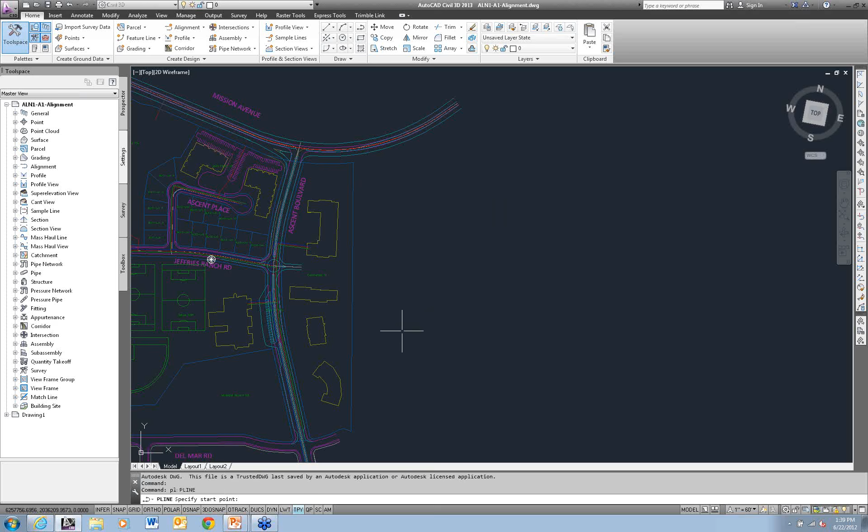So I'm going to come over here and I'm just going to play around a little bit. I am going to create an alignment. But first of all, I want to draw my geometry. So I'm simply going to draw a polyline. Start the polyline command, pick my first point, pick my second point. I'm going to throw an arc in here, so I do A for arc. And let's see, I want my arc to end about there. I'm going to go back to drawing a line, and I want this to be tangent, so I'm going to play the part of the planner, and I'm going to say, that looks tangent.

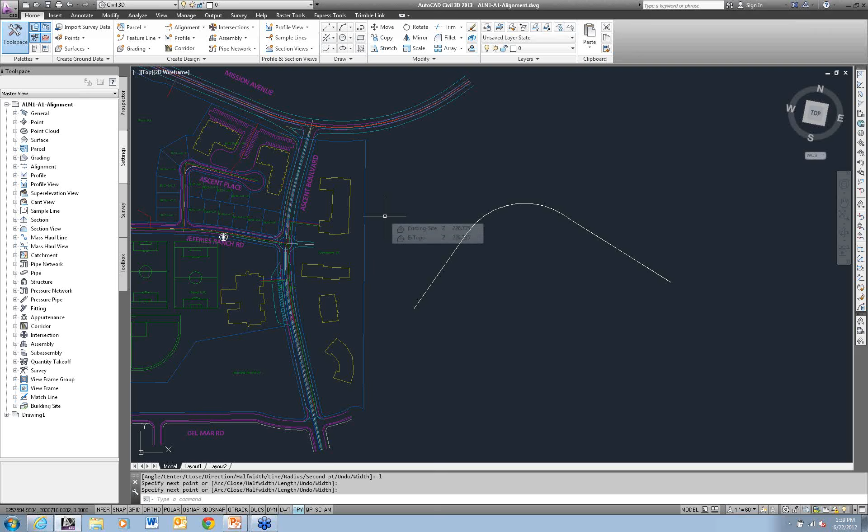I'm sure nobody has ever seen that before, right? Yes, I do know how to draw a tangent line off a curve. Don't worry about that. But you get this sort of thing all the time. Right? Somebody just doesn't want to take the time to make sure it's tangent, and you get those things like that. So I'm going to create an alignment from this. So I create an alignment from objects.

Select the polyline. I want the stationing to start at the left, so I pick near the left-hand side. It's going to ask me for the direction. That works. And then it's going to ask me for information. So I'm going to give this a name. So this is going to be Becky's Way.

My wife's name is Becky, and it's always her way. I've been married 13 years. I have learned that.

Stationing. I want to start at station, say 1+00, so 100. Assign a site, a style, labels. If you want to, you could have it automatically add curves between any angle points in your alignment. We also have something known as design criteria. So the design criteria is used for roadway design, specifically roadway design.

So I can assign a design speed, and based off of that design speed, I can assign different criteria based off of super elevation. So if I'm allowed to do a 4% super elevation at 60 miles an hour, I have to have this minimum radius. At 20 miles an hour, I have to have this minimum radius. Things along those lines. In this case, I'm not going to be using criteria-based design. I'm just going to be laying out a basic road.

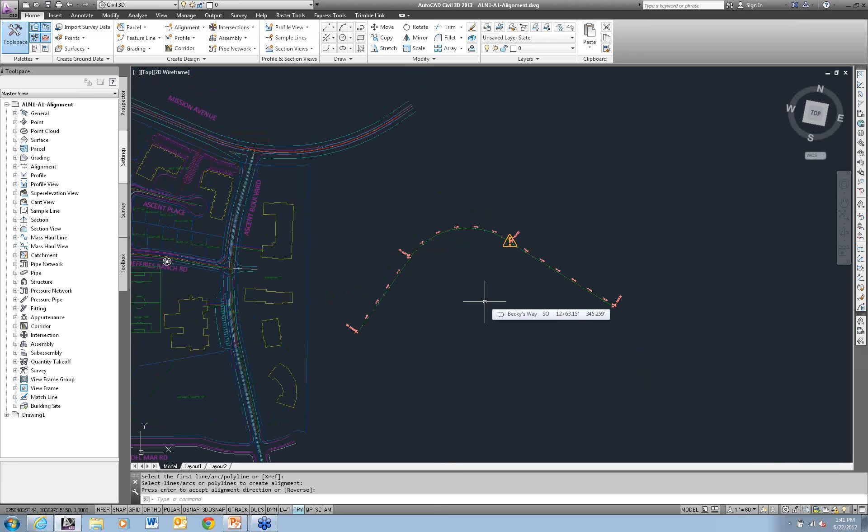And it creates the alignment for me. And oh, look, there's a mistake somewhere. Gee, what could that possibly be? So I come in here and I look at it and I get this nice little warning symbol here. I point my mouse at the warning symbol and look, the tangency is violated. So this is one way of creating alignments. Yes, you can go in and edit that alignment and make it tangent. It's real simple to do if you know how.

You go into your geometry editor. Right, you bring up this vista or grid view or whatever you want to call it, and I just change it from being a fixed entity so that it's constrained on both sides. So it's a free entity. And that fixed the tangency violation there for me. So now it's tangent to both the incoming and the outgoing line.

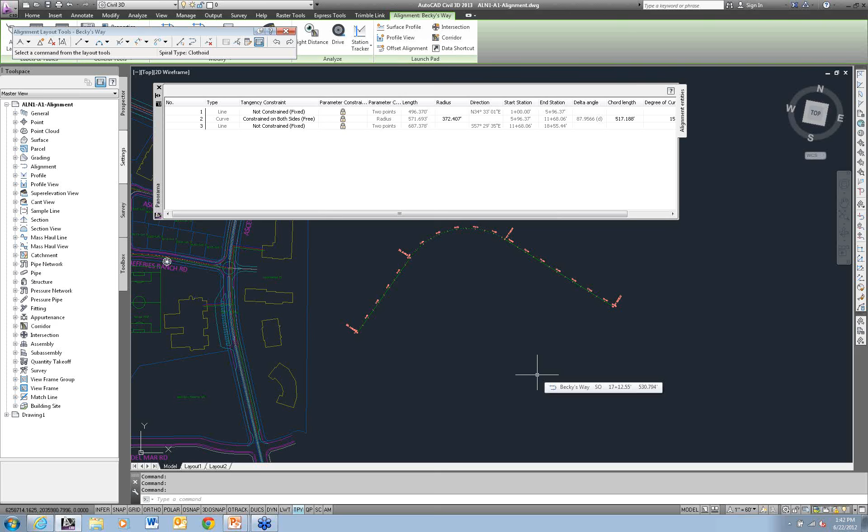Now it had to change the geometry a little bit. So perhaps the endpoints of the lines aren't at the same locations, but I'd much rather have it be tangent than have the ends of the lines at those exact locations. So this is one way of doing it. Another way of creating an alignment is just to create the alignment. So under the alignment pull down here, I can create an alignment.

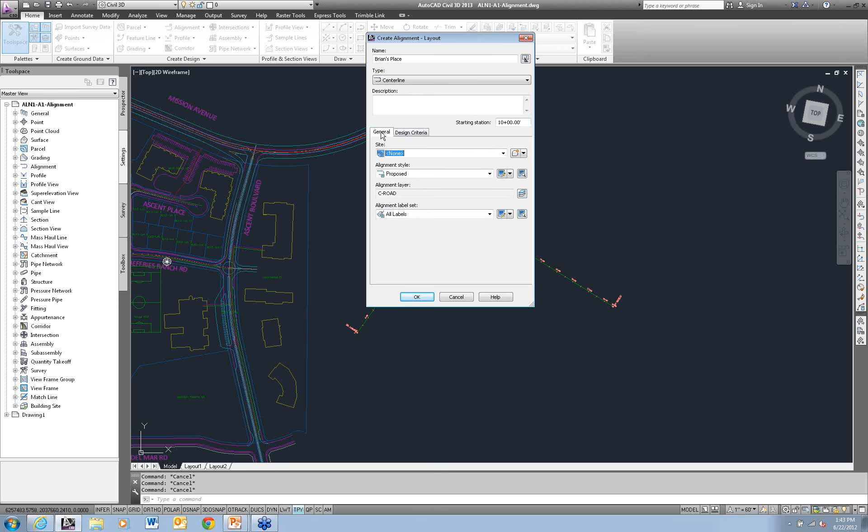Give it a name. So that was Becky's Way. So this one is going to be Brian's Place. I bet you didn't see that one coming. I want this one to be 10+00. Likewise, I can assign a site, style, labels, design criteria. If you notice, I don't get those conversion options because, well, I'm not converting anything.

So I select OK. And now I can come in here and I can create tangents. I can draw tangents with curves. I can draw them without curves. I can come down here and I can set the curve values if I want to have it automatically create the curves for me. So I'm going to come over here and I'm going to create an alignment here for Ascent Place.

So I'm simply going to draw tangents with curves. My curve radius, well, for this particular little road here, 200 feet is way too much. I'm going to set it to 20 feet. And I'm going to come in here and I'm going to draw tangents with curves. Snap to the center line of my road. Oh, wrong spot.

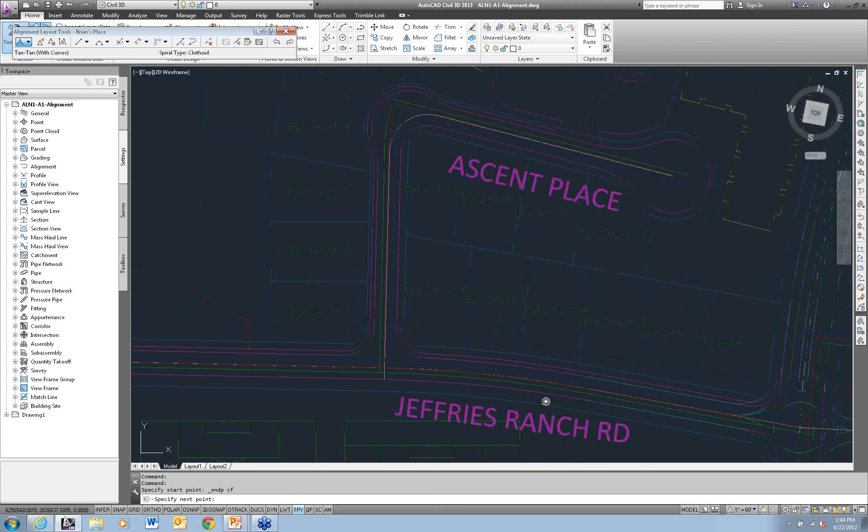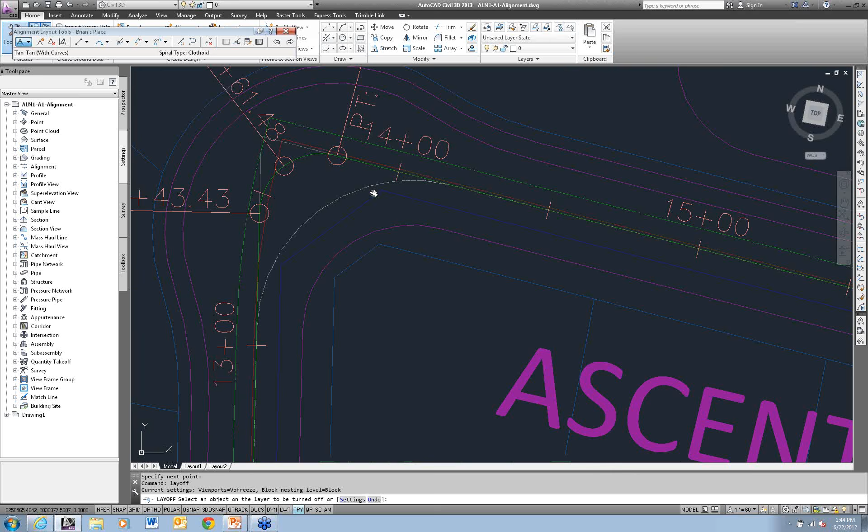Snap to the intersection of a couple lines, so the intersection of that line and that line there. And then I want to come all the way down here and snap to the end of that line there. And when I do that, it creates my alignment for me. Let me turn a couple layers off here, just to make life a little bit easier. Oh, too many. Hate it when I do that. Get rid of my water and my... I'm turning off my utilities here.

So I've got an alignment here. The radius isn't quite right. Grab the alignment, use the grips, change the alignment. Now I know I want this alignment to have a radius of 50 feet. So if you have your dynamic input turned on, I like the words rather than the icons personally. I can simply grab this little triangle grip here and type in a radius of 50 feet. And it'll change the radius for me.

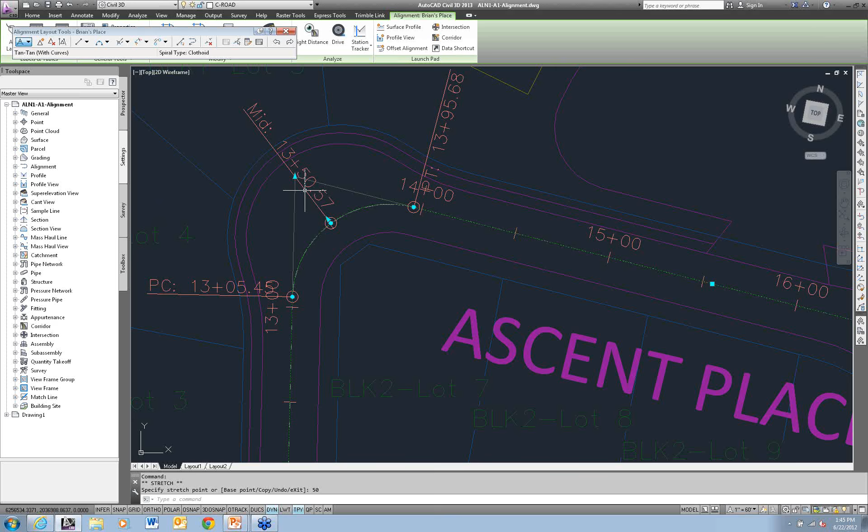Dynamic input is great. I love dynamic input. When it first came out, I hated dynamic input, and then I was forced to teach it. And now I actually like it. If you're not using your dynamic input, I recommend you try it again.

Here I'm getting an alignment for Jeffries Ranch Road. Let's go ahead and create an alignment for that. This time I'm going to create an alignment from the object. Come in here, I select the object, and you'll notice it's not letting me select it.

The reason it's not letting me select it is it's in an XREF. Just about any time Civil 3D asks you to select an object and it's in an XREF, you can type X or XREF. Grab this alignment, create an alignment from it. So I created an alignment from an object that was in an XREF. So these are my alignments.

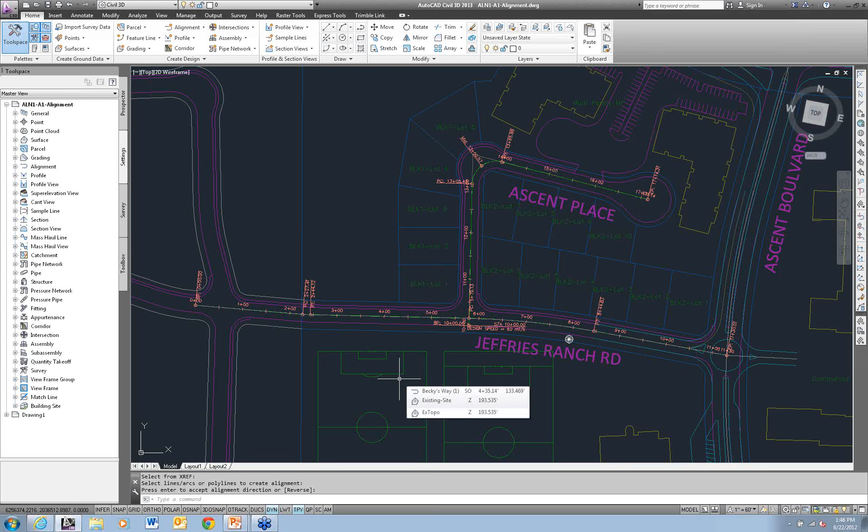Next thing I need to do is I need to create a profile. Now typically you're going to be working with surfaces as well. Now in this particular drawing I don't have a surface in here yet, so let me go ahead and data reference one. Oh, alright, let me go ahead and set this to the right location here real quick. Give me a second, I should have had this done prior, shouldn't I have?

Anybody wants a refund, we'll be glad to give you one.

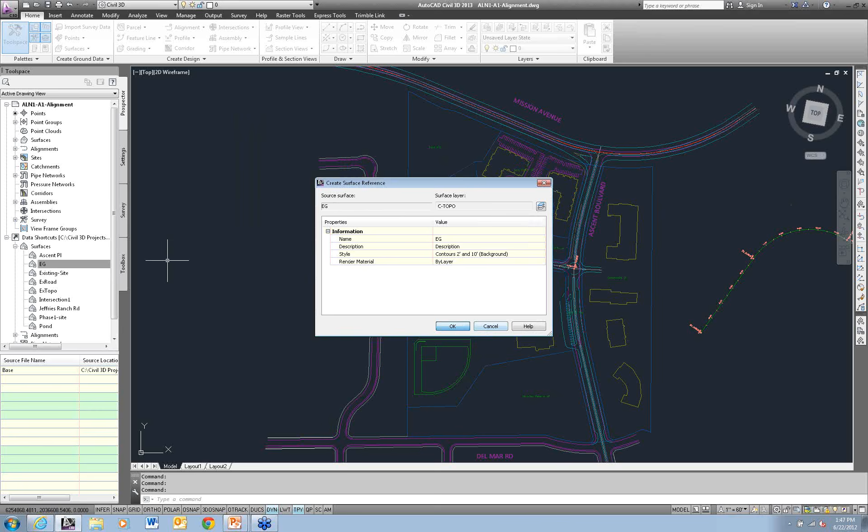Setting it to the wrong location. Give me just a second here. I got it. There we go. So here I've got a surface. Let me go ahead and reference in my surface. So it's just the existing ground surface. Your name cannot be empty. One more time. QRST. Sorry about this, folks. Oh, look at that. I did have one in there. It was just set to no display.

Alright, so here is my surface. I want to know what the existing ground surface is doing along the alignment, so I create a profile. So profile, I'm going to create a surface profile. Surface profile shows me exactly what's happening along my alignment. So this is going to be, oh, I did not do a good name in renaming these, so let me go ahead and select this alignment in the drawing. I want to sample the existing ground. I add that in as a profile.

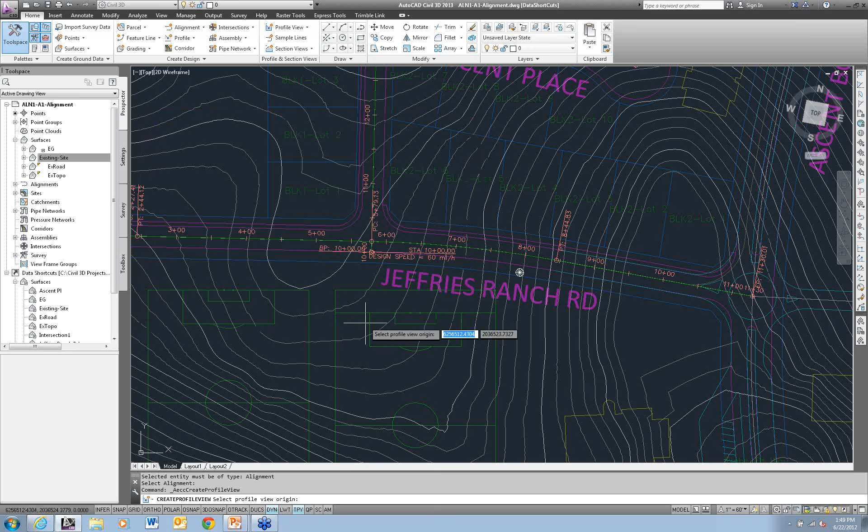I can come over here and I can change the style. Existing ground profile works. I want to see this in my drawing, so I create a profile view. In here I can specify the starting and ending stations, the height, the display options, what profiles do I want to see. One thing I will always do is I will always double check my labels. So when you're creating profile views, stop at the profile display options and double check your labels. Got some data bands, some hatching. I create my profile view, pick a point in the drawing, and it creates my profile view for me.

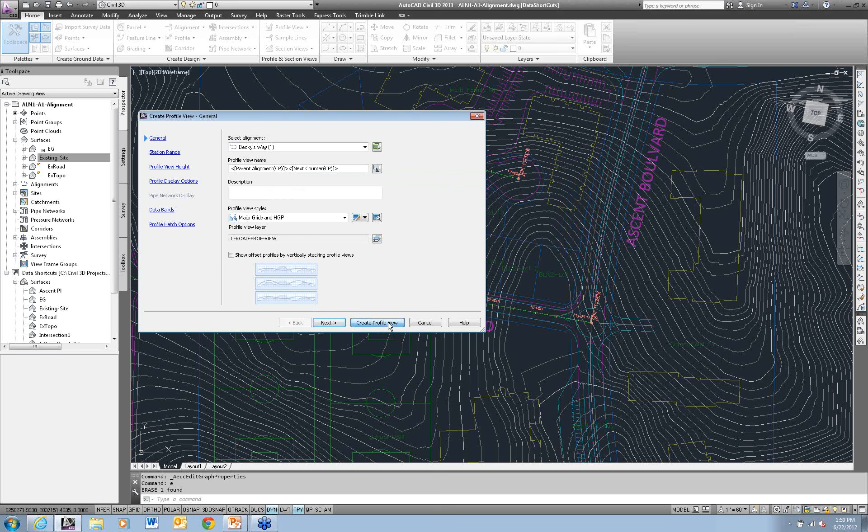Alright, let me try this one more time. I did it for the wrong surface, that's why. Set it down for this one. There we go. And there's my profile. So this is the existing ground. Along the alignment, this is what the existing ground surface is doing. Once you have the existing ground surface, now this is optional. You don't have to have an existing ground surface to design a road. Most of the time you will.

If you give me just a second here, the batteries in my mouse are running dead, so let me swap these out real quick. Much better. Thank you, Lawrence.

So now that I have something that I can design off of, I'm going to go ahead and create my profile. My design profile in this case. And that's done through the profile creation tools. It's going to ask you to select the profile view. You have to have a profile view in order to create a design profile. Give it a style, give it a name, a layer. All right, so this is going to be Becky's Way Finished Ground. Use a complete label set. Just like my alignment, my design profile can use a design criteria. So based off of the design speed, what's the minimum K value of my vertical curves?

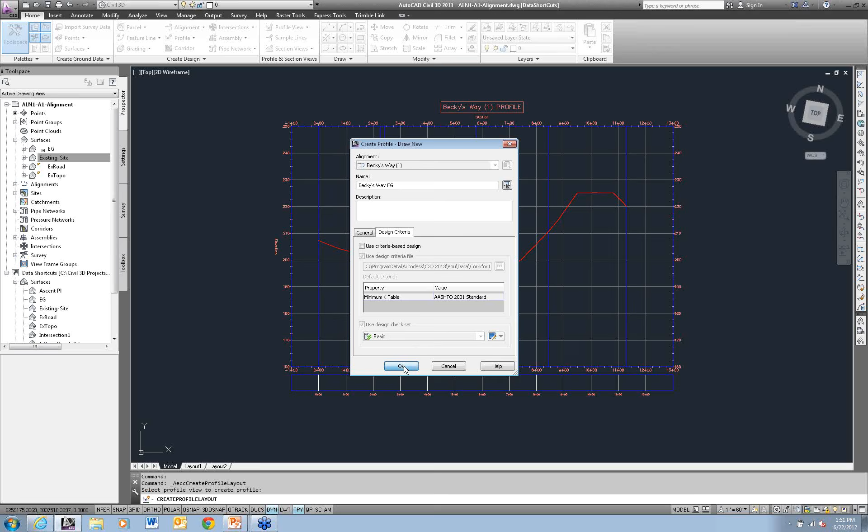It brings up a toolbar for me, just like I had for my alignment. Here I'm going to draw tangents. In this case, I'm going to come back and add my curves later myself. So I'm just simply going to draw tangents.

And I want to start at, well, let's take a look at our site over here. So at about station 200, I need to tie into the existing, for the design of the other subdivision. And I want to come down into my site at 2% for 150 feet. So I need to put a 200-foot curve in here. So at station 200, I need to have a specific elevation, and just to make my life easier, I'm going to pick an elevation of 200. And I'm going to come down at 2%. I like the number 2.

So what I'm going to do is use one of these cool transparent commands over here. If you haven't been playing around with the transparent commands, these things are awesome. I'm going to use a transparent command that says Profile Station Elevation. I'm going to select my profile view. It's then going to ask me what station do I want to draw at. I can pick it on the screen if there's something for me to snap to, but in this case, I simply want to type in a station of 200.

What elevation do I want to start at? Likewise, if there's something on the screen I want to start at, I can pick it on the screen. If not, I can always type it in. So I'm going to start at an elevation of 200. And it just picked that point in the profile view for me.

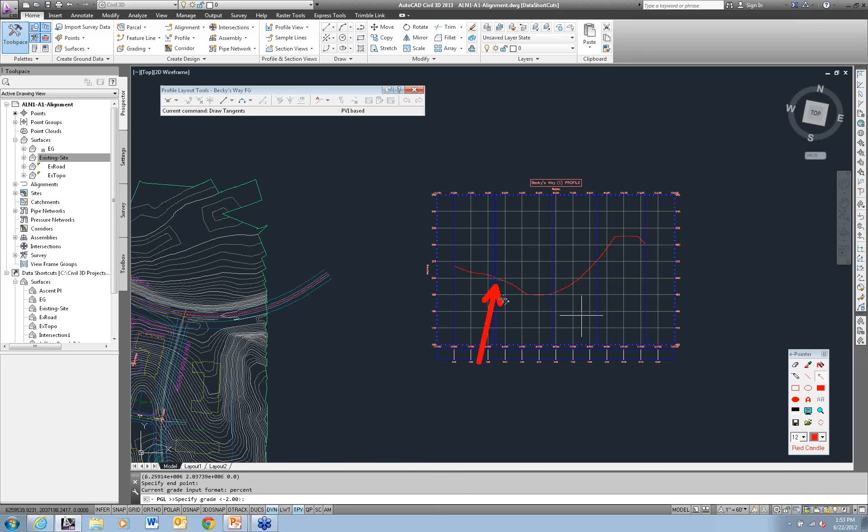I'm done doing the profile grade length. I'm going to hit Escape here, and it takes me back into my regular old prompt. So maybe I want to come down here, up here, something like this, and then maybe snap into the existing ground over here. Something along those lines. If I want to make some changes, I can do that. Just grab it, grip edit, maybe pull this thing down here a little bit more. Maybe pull it over here, maybe pull this up this way a bit. There's lots of things you can do to edit this.

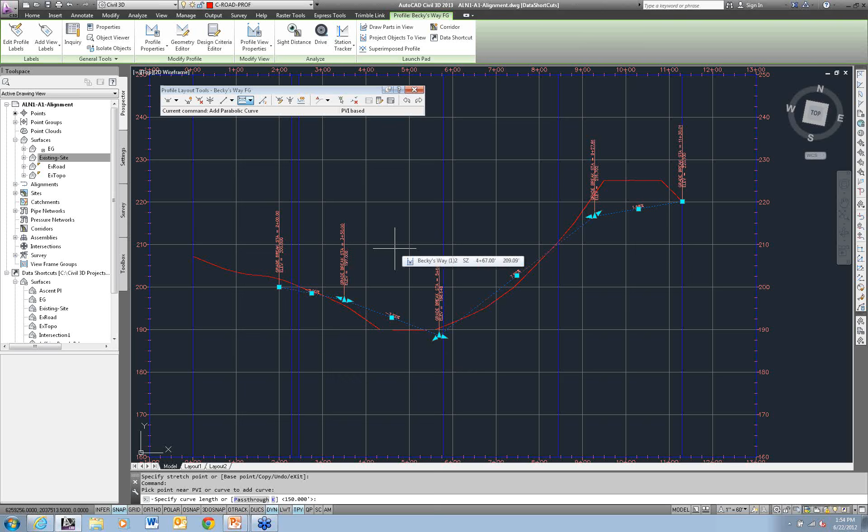I've got the profile created. I want to add in some vertical curves now. I have tools up here on my toolbar that allow me to put in vertical curves. So I'm going to do a free vertical curve based off of the PVI. Picking a point near the PVI, and it asks me for the length of the curve. So I'm going to put in a length of 200 feet here. Hit enter, and it labels it up for me. Ooh, I got some label issues going on in this drawing.

All right, repeat the same process. This one's going to have a length of maybe 100 feet, and this one's going to have a length of 200 feet, and it creates my profile for me. Adds the vertical curves to it.

So I've got two of the three pieces done. I've got my profile, I've got the alignment, now I need that cross-section. And in Civil 3D, that cross-section is known as an assembly. So I'm going to create an assembly. Take a point on this, give it a name, so this is going to be a basic road.

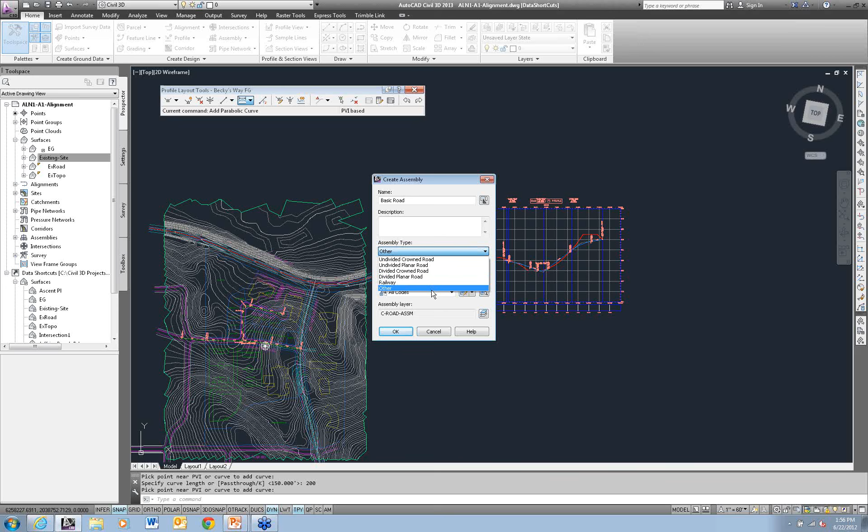If you're doing some fancy highway type design, there's all sorts of things you can do here. If you're in 2013, you can also choose this to be a railway assembly. But in my case, I'm doing a fairly simple road. I'm going to leave it set to other. Select OK, pick a point in my drawing, and it creates my assembly for me. Ooh, how exciting. So this thing here is my assembly. It runs horizontally along my alignment, vertically along my profile.

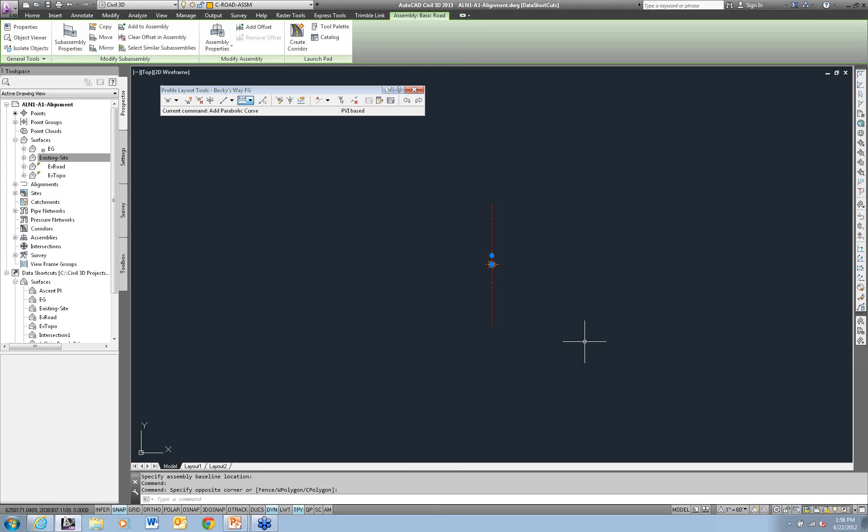To this, I would then want to attach sub-assemblies. And my sub-assemblies build out my cross-section for me. Your sub-assemblies are found on your tool palettes. So up here on your ribbon, on the palettes panel, you have the option to bring up tool palettes. You can also type TP for tool palettes, Control 3.

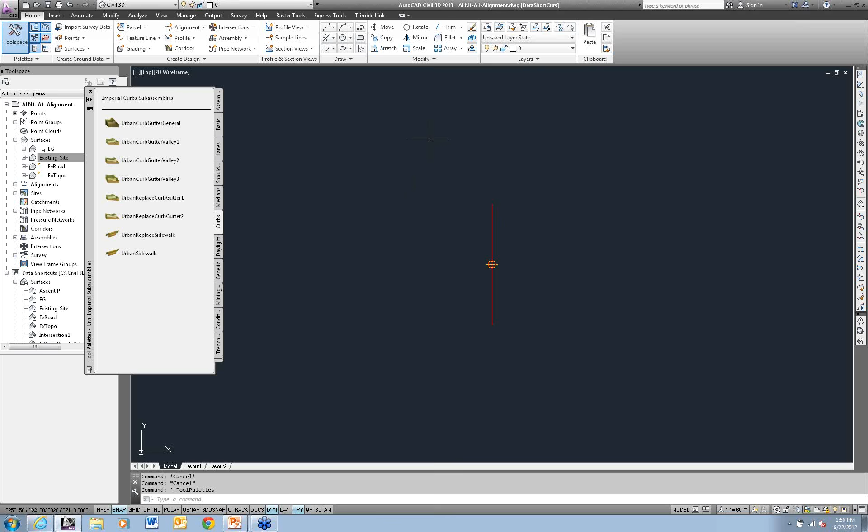We'll also bring them up. So I want to build out my road cross-section. So I go find the different pieces of my assemblies that I want to use. In this case, I want to put in a lane. So I'm going to choose lane. I'm going to use my go-to lane subassembly. This is the lane super elevation AOR. AOR stands for axis of rotation.

It's a great subassembly. It can be extremely simple if you want it to be really simple, but it can also be extremely versatile if you need it to be. So I'm going to choose Lane Super Elevation AOR. It's going to open up my properties. It's also going to ask me where do I want to attach it. So I set the properties, and then I attach it to the assembly.

In this case, I'm going to do a couple of things. If you're not using the fancy super elevation stuff, I recommend turning off potential pivot point. If you leave this on, you'll get those yellow flags in your assembly. They're really important if you're doing divided highways with different super elevation methods and things like that. But if I'm just doing a basic road, I don't need this to be a potential pivot point. So I'm going to set that to no.

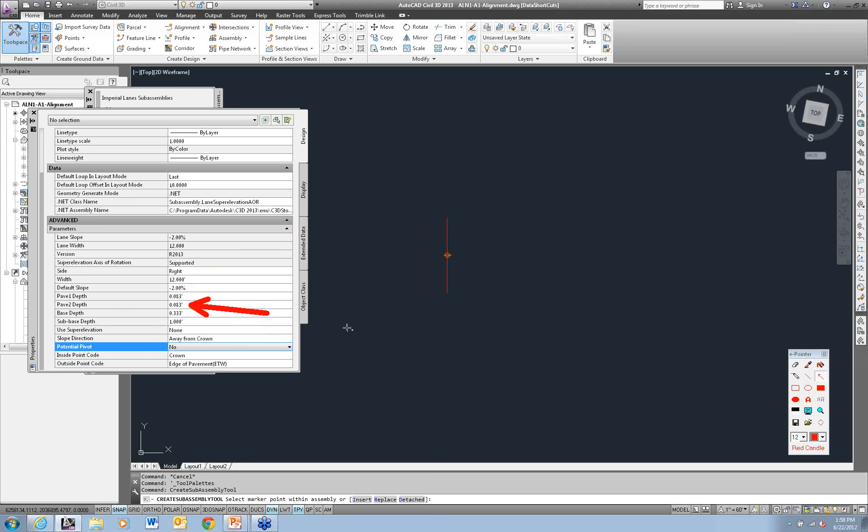As you can see in this case, it's going to be a 12-foot wide lane, and it's going to have a cross slope of 2%. If that's all you're worried about, that's all you need to set. If you want to, you can come in here and start applying different material depths. You can use super elevations. You can do an inside point other than a crown. Oh, it's all sorts of fun stuff here. But in this case now, I'm just going to attach it to my assembly. I select my assembly, and it attaches the road to the assembly.

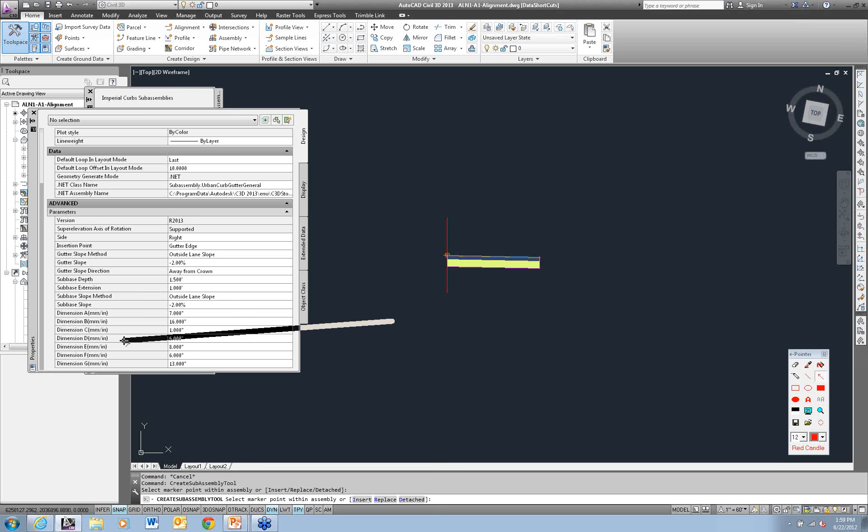Once I have my lane in, I now want to put in the next piece of my cross-section. In this case, I'm going to be using curb and gutter. So I'll come to my Curbs tab, and I'm going to use Urban Curb Gutter General in this case. This is the vertical curb and gutter. So I choose Urban Curb Gutter General. Once again, I come down through here and I set all these parameters. Now this gets a little confusing here because I don't remember what dimension D is, or F, or G, or A, or B. So what are all these dimensions here?

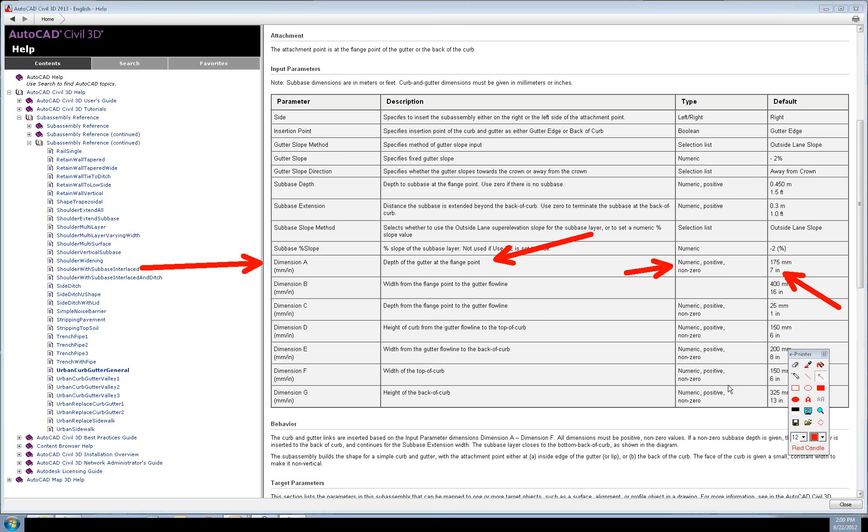Well, if you go into the help file for your subassembly, to access the help, right-click on the subassembly name and choose Help. They've done an outstanding job with the help system here for subassemblies. So here it's showing me where all those different dimensions are, and I can set them to be whatever I need. If I'm a little bit confused, you can scroll down a bit, and it'll tell you what dimension A is. Dimension A is the depth of the gutter to the flange point. It's a numeric, positive, non-zero number that defaults to 7 inches. That's dimension A. Has to be positive, has to be non-zero.

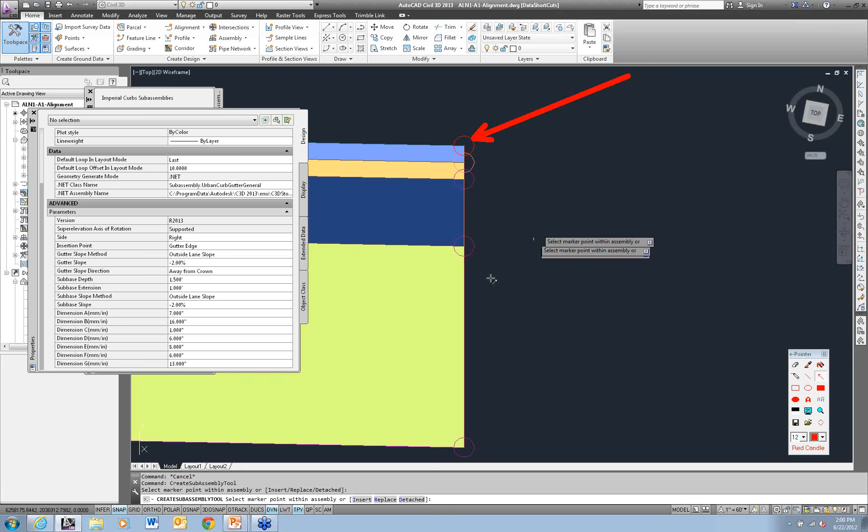So now I can come in here. Now that I know what all these different values mean, I come in here and I set them the way I want them to be set. I'm just going to use the default values here. I then attach it to the location within the assembly that I want it to be added. In this case, I want the flange of my gutter to attach to the edge of the road. So I select that marker in the assembly. Don't snap to the center of it. Select it. And it attaches my curb to that lane.

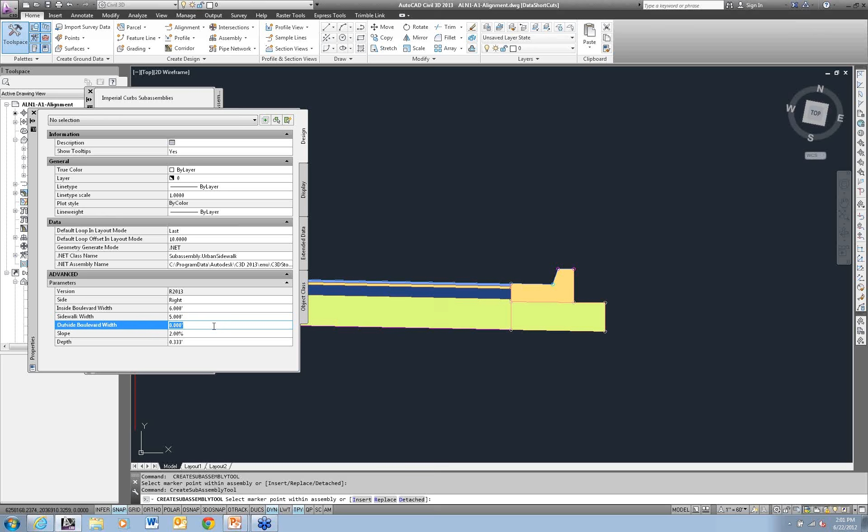If I want to put a sidewalk in here, I'm going to choose an urban sidewalk. I want a nice tree lawn. I'm going to put in a 6-foot inside boulevard. That's my tree lawn. Maybe I put in a 2-foot outside boulevard. I want to attach this to the back walk. And I have my sidewalk in here now. And then I just continue to build out my cross-section. It can be really simple. It can be very complex.

This is the end of my typical section from this point on. If I'm in a fill situation, I want it to daylight down. If I'm in a cut situation, I want it to daylight up. So I use a daylight subassembly. The one I'm going to use in this case is daylight standard. There are lots of options here, but I'm going to go with daylight standard here.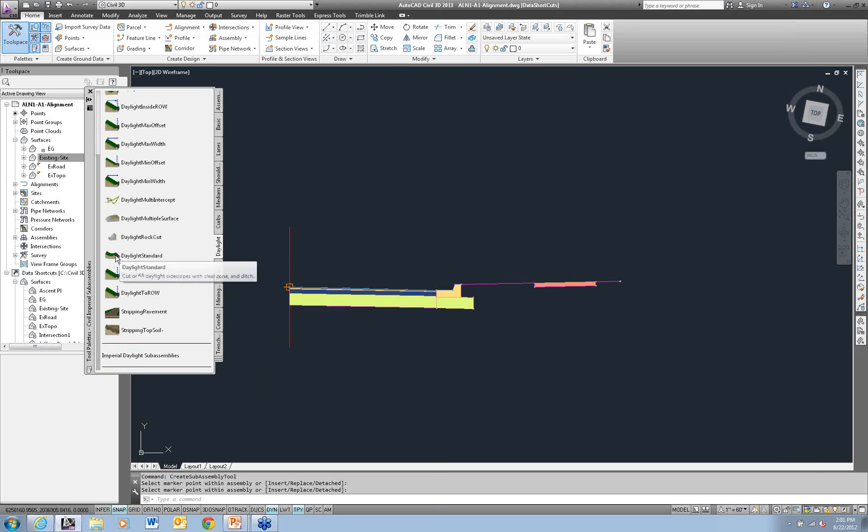Fill in the different parameters. As you can see, this particular one has lots of different options. I'm going to attach to the outside boulevard here. And as you can see, in a fill situation, this green line just goes down. In a cut situation, it's actually going to put in a ditch and then go up.

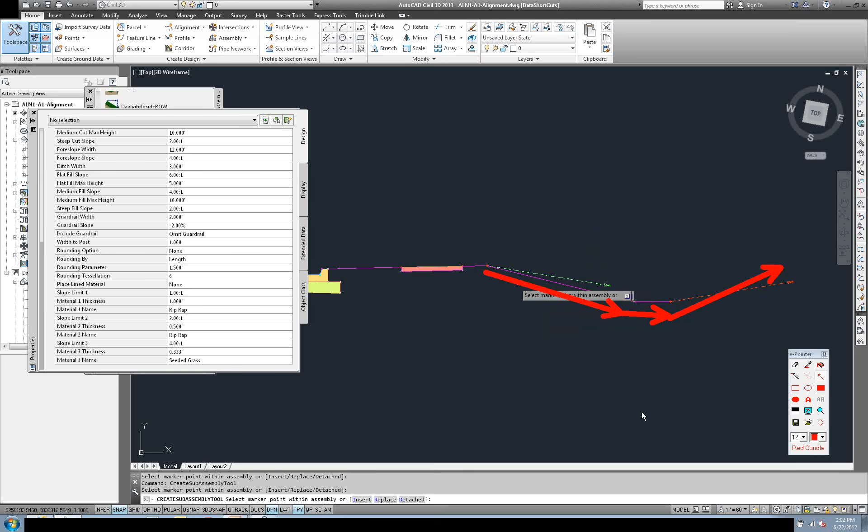So I've now modeled out half of my roadway. I'm going to take this and then mirror it to the other side. Now, when you're dealing with sub-assemblies, you want to try to avoid using the AutoCAD copy, move, and mirror, because all it does is it adjusts where it is relative to what it's attached to. So all your sub-assemblies have an attachment. So this is attached to my curb and gutter.

If I were to move this someplace else just using the AutoCAD move command, you can see how anything that was attached to it moved along with it. But this point is still attached to that top back of curb with a displacement now. So you just have to be aware of it. There are times when you would want to move an assembly, sub-assembly, but for the most part, you want to use the editing tools that come with Civil 3D.

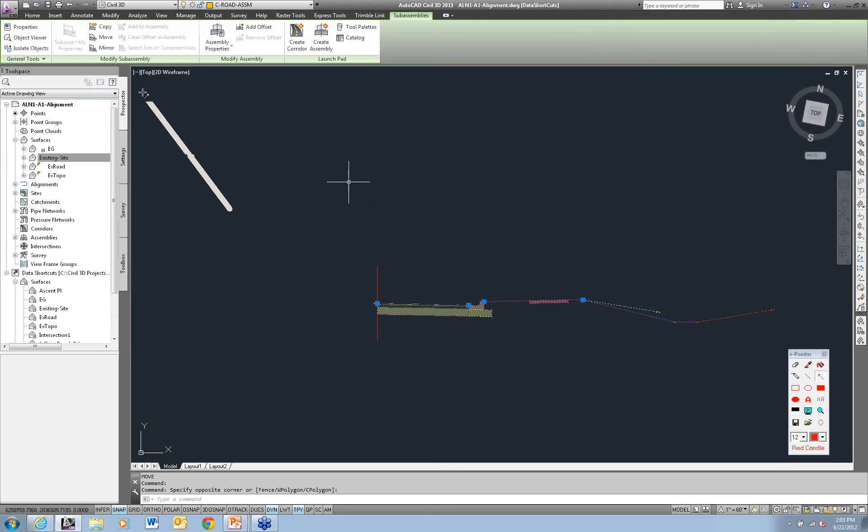So I want to mirror this to the other side of the assembly. I grab all of the sub-assemblies. Up there on my ribbon, I then have the copy, move, and mirror sub-assembly commands. In this case, I am going to mirror my sub-assembly. Now, the mirror command here is, I like to refer to it as a mirror to command.

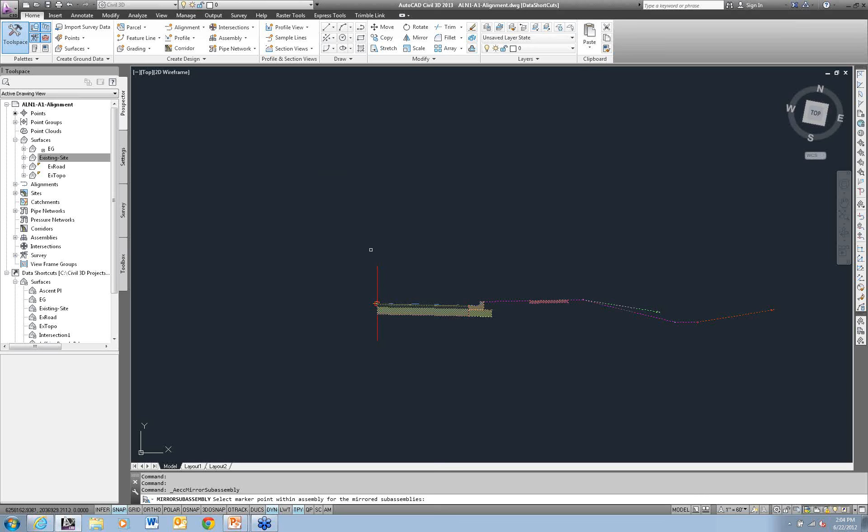So it's actually going to take my sub-assemblies, copy them, flip the insertion side, and say, well, what do you want to attach to? So in this case, I'm going to attach them to the assembly. And it mirrors it on over. I now have my assembly.

All right. A couple of things that I like to do with my assemblies. This assembly I'm going to be using all the time. I work in the city of Bryanville, and the Bryanville standards say this is the type of road we like to have. And I do lots of work in Bryanville. I want to be able to share this assembly with the rest of my projects. So on my tool palettes, I can actually create another palette. So I'm going to put it up here next to my other assemblies.

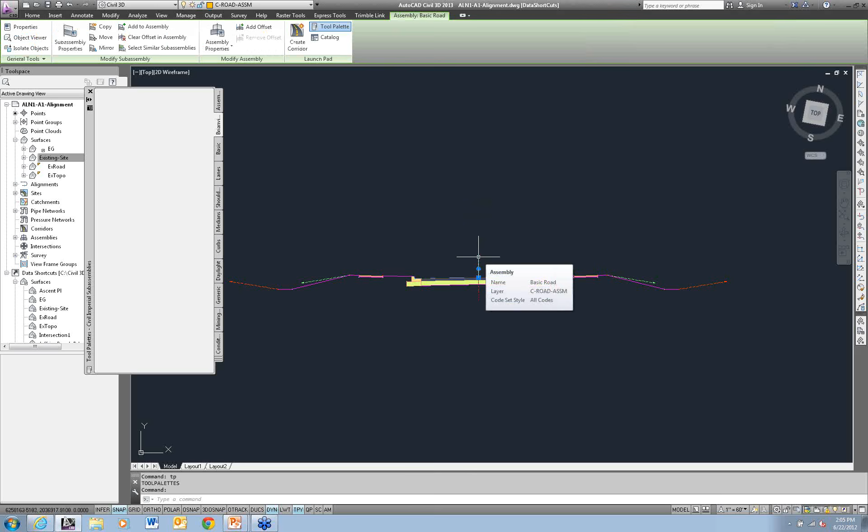Right-click on a palette, choose New Palette, give it whatever you want. I'm going to call this one Bryanville. I can then take my assembly, grab the assembly, and then press and drag without using grips to my tool palette. When I release, it's then going to copy this assembly to my tool palette.

There's my basic road. So now anytime I go into a new drawing, so I'm just going to make a brand new blank drawing here, I can left click on my assembly on my tool palettes, left click in my drawing, and it creates my assembly for me.

So I've got the three things that I need for my roadway design. I've got the horizontal design, the alignment. I've got the vertical design, the profile. I've got the typical cross-section, the assembly. I now take all three of those things, cram them together, and I create a corridor model.

So I'm going to run the create corridor command. Now, if you're in 2012 or earlier, this is actually broken up into two different options. You have create corridor and create simple corridor or something like that. In 2013, it's one command. So I'm going to run the corridor command, give it a name.

I don't know, call it Laurence Subdivision. Probably misspelled your name. That's all right.

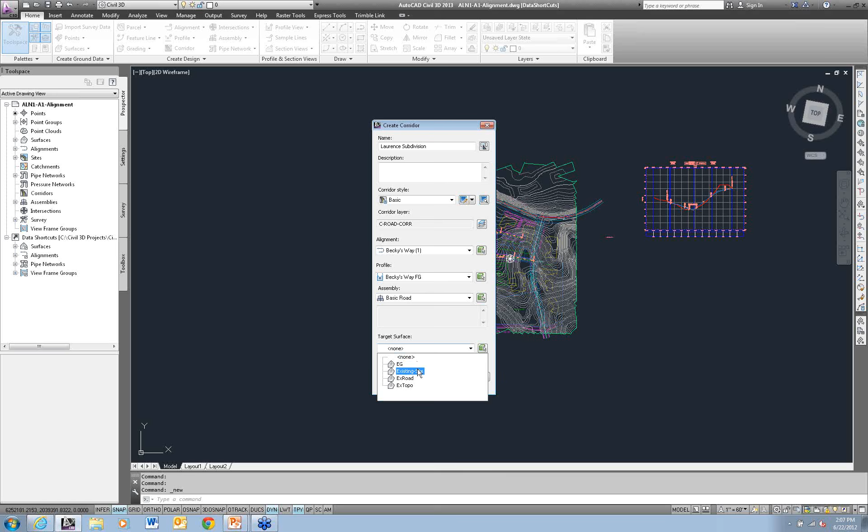Give the corridor style, layer, the alignment. So you have to have an alignment. You have to have a profile for that alignment. You need an assembly. So I choose all three of those things. If my assembly can target things, for example, my daylight lines. My daylight lines can target a surface for the daylighting process. Well, what surface do you want those to target? So I want them to target the existing site.

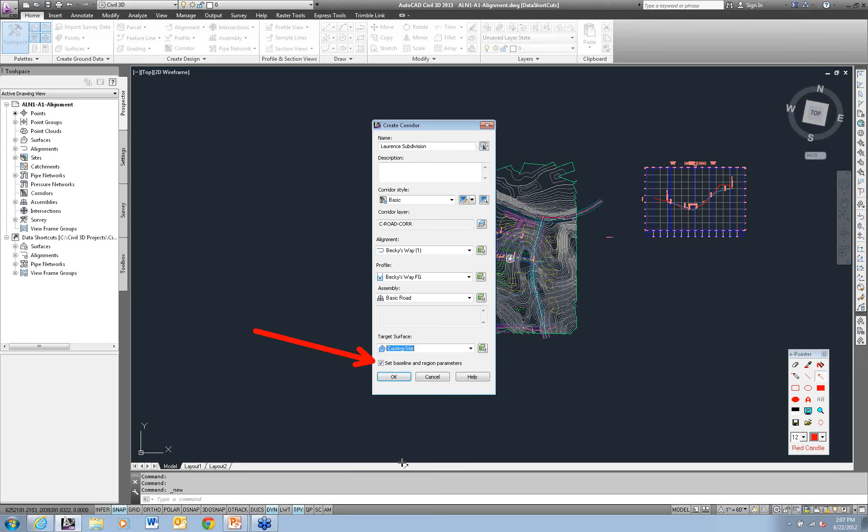You can then also come in here and set the baseline and region parameters. So if you leave this toggled on, this is very similar to the 2012 create corridor command. If I uncheck this, this is along the same lines of the create simple corridor. So I'm going to toggle this on because, well, I need to set some parameters here. And I have baselines, and I have regions.

I'm going to expand this out a little so it's easier to see all this wonderful text. So a baseline indicates, hey, I want you to use this alignment and this profile.

And that's pretty much it. The region is where all the fun stuff comes into play. So the region says, okay, for this baseline, for this alignment and this profile, I want to assign this assembly from this station to this station, and I want to do it this often. And I want it to target these things. So all of that is contained in the region.

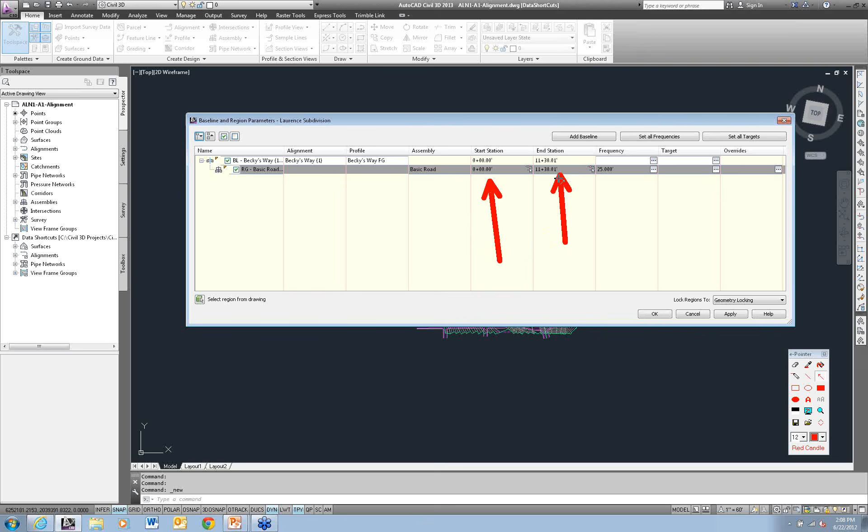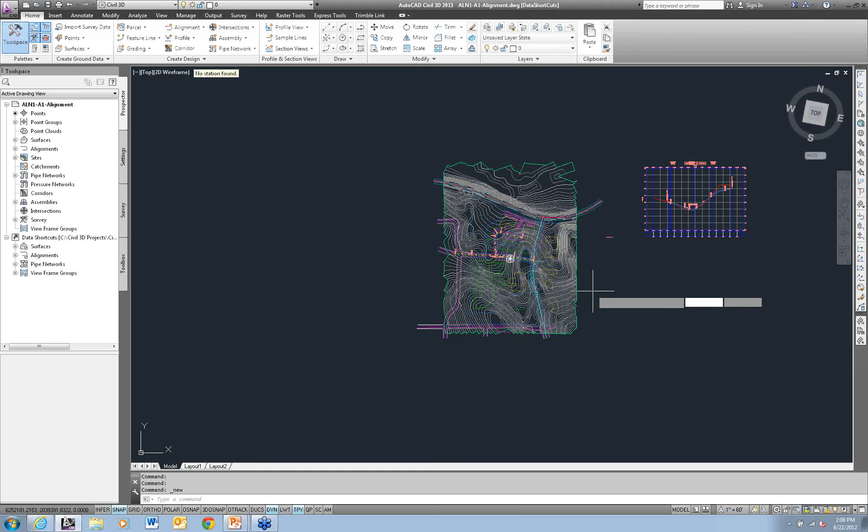Now what I want to change here is my start station and my end station, because my profile doesn't begin at the very beginning here. So I want to change my start station to the same station I used, 200. When I created my profile, I typed in that number, so I can type in 200 here. No problem with that. But my ending station, let's go see what station it ends at. All right, so it's 11 plus 30.01.

So in this case, I actually snapped to the profile. I snapped to something here as I was laying out my profile. What station did I snap to? Did I snap to station 11 plus 30.01? Possibly, but very, very unlikely. Most likely, I snapped to a number that rounds to 11 plus 30.01. So if my profile actually ends at station 1130.009, there is no profile at station 1130.01.

And so if I type in 1130.01 for my corridor ending station, there is no profile there. My corridor is going to dive down to an elevation of 0. And if you're here in Colorado or Wyoming, that's not good at all. It's a very, very steep road. So I always like to buffer my unknowns just a little bit. Instead of 1130.01, I'm going to type in 1130.00. If it's at the end, I buffer it down a little bit. If it's the start, I buffer it up a little bit, just to make sure that I'm within the limits of the profile.

I'm going to select OK here. I'm going to rebuild my corridor. And now I have my corridor built here. So now I have my corridor. Great. What do I do with it? Well, most likely you're going to want to build a surface from it. So I'm going to grab my corridor and build a surface from the corridor. I'm going to my corridor surfaces.

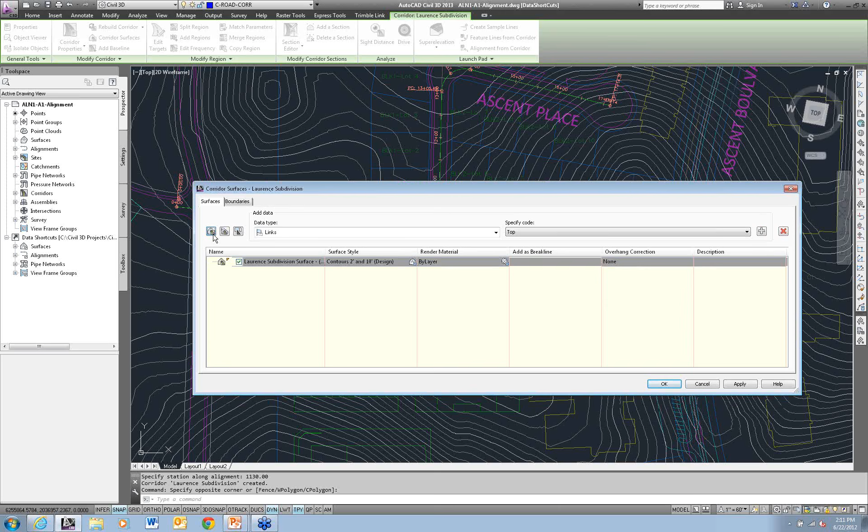And I'm going to create a surface. So I'm going to add a surface in here and give it a name. I'm going to call this one Roadways. Give the surface a style, so I'm going to assign a 1 foot and 5 foot design type style. What data do you want to add? There's 2 types of data. You can add links or feature lines. Links go along the section. Feature lines connect points between the sections.

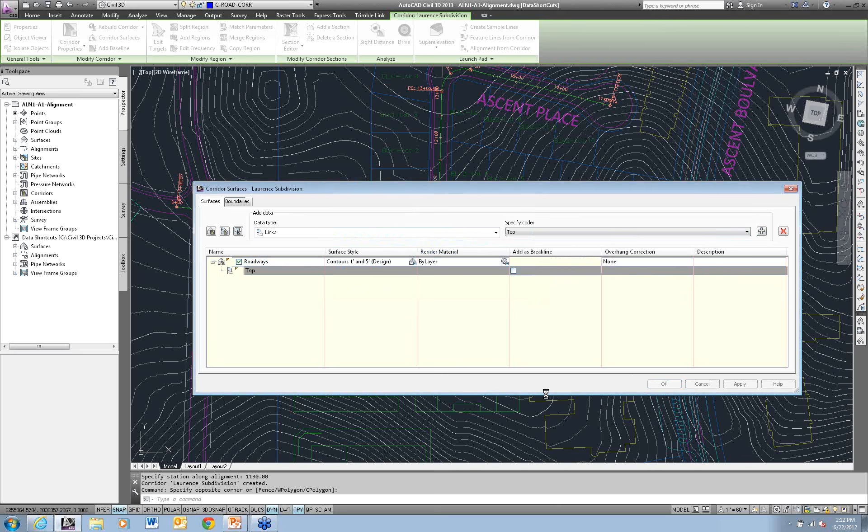In this case, I'm going to add in my top links. Your top links represent the top of your design. Datum link represents the bottom of your design. I add that in. Select OK. Go ahead and rebuild my corridor. And it creates my surface for me.

Looks like we've got a couple of issues going on here. I've got surface going out way beyond the limits of my corridor. My corridor actually ends here, but my surface comes all the way out here. Why is that? Well, I have corridor data here and corridor data here, and the surface just comes through and triangulates between them. I never told it not to. So I need to add some more data here. What am I going to add? I'm going to add a boundary to my surface.

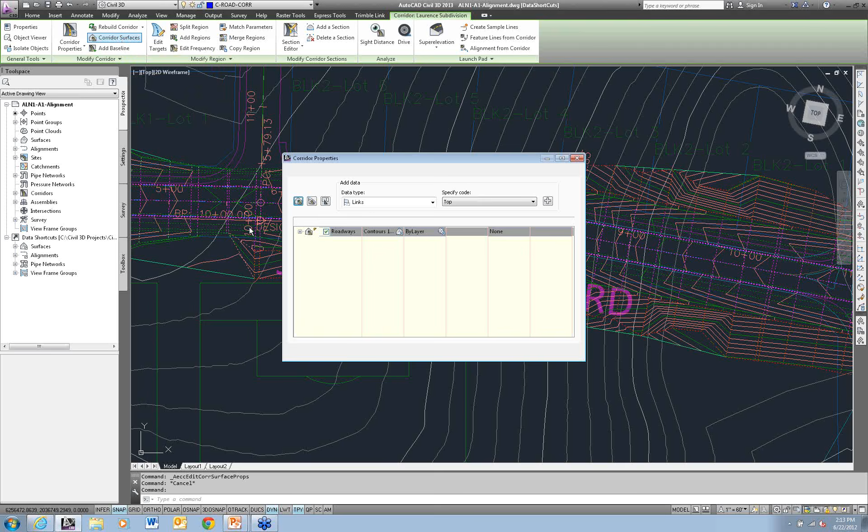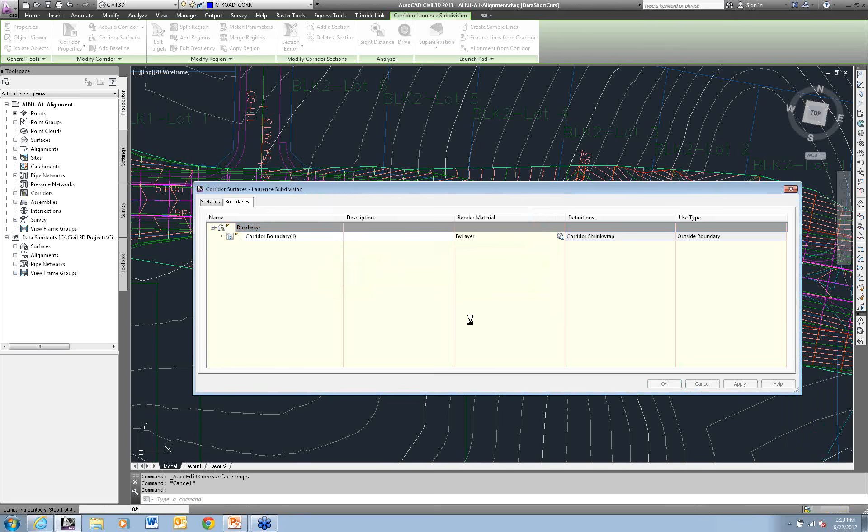So I go back to my corridor surfaces. I have a boundaries tab here. In this case, I want the surface to end at the extents of the corridor. So I choose corridor extents as outer boundary. Basically, this does a shrink wrap. Select OK, rebuild the corridor, and there's my beautiful surface. Let's go ahead and take a look at the surface in 3D.

And there's my surface.

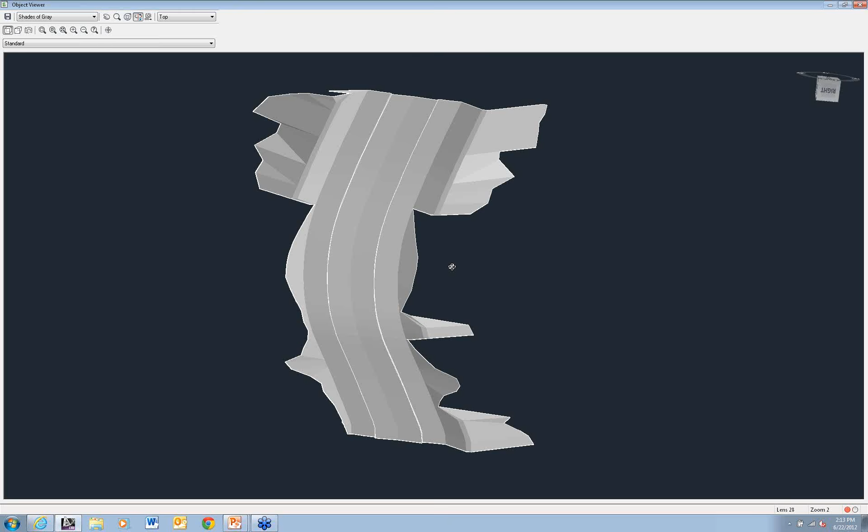Wow, no questions. Come on, guys, gotta help me out here. Ask some questions. I'm almost done.

Now, I do want to show one more thing here. I have a bus pullout right about here. So I need to make this particular lane extend out wider so my buses can pull off and drop off all the wonderful little soccer players that are going to come over here and play soccer.

So I'm going to draw the edge of my asphalt simply with a polyline. So I draw a polyline, and I'm going to snap to my edge of asphalt, which is about there, and say, I want it to come out here, go over here, and come back over here, something like this. Just a polyline. You would want to be a little bit more precise with this when you do it, but I'm just going to show you how simple this is to do.

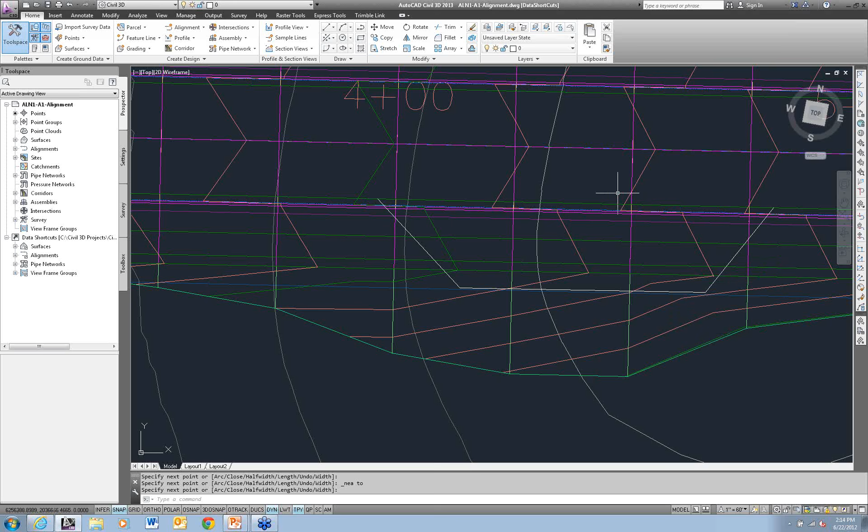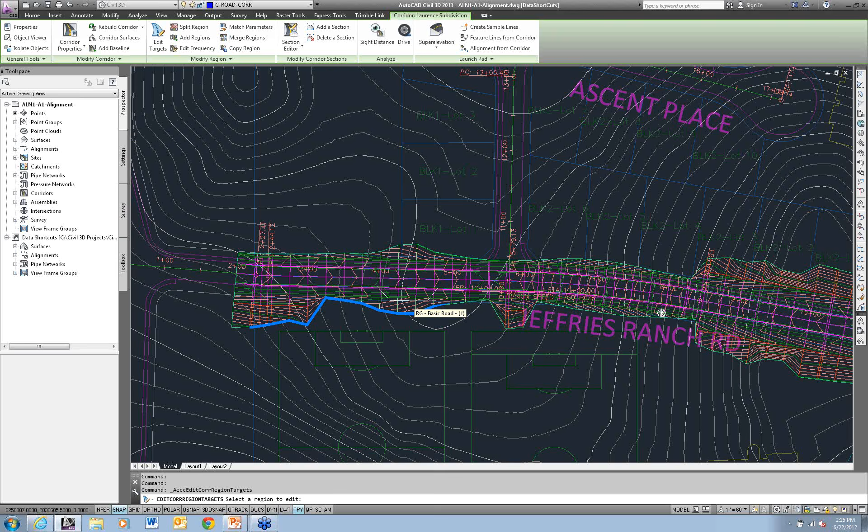I'm then going to grab my corridor, and I'm going to edit the targets for this region. I want this lane to continue out until it hits that polyline. So I'm going to edit my targets. Which region do I want to edit them for? Well, I only have one region here. What am I trying to target? Well, I'm trying to target my lane on the right-hand side.

So over here where it says it's not targeting anything, I'm going to change that. So I choose the word none. It then allows me to target something. By default, it's going to ask me for an alignment. So I've already made a change here. But in this case, you could choose either alignments or feature lines, survey figures and polylines. So I choose polylines. I select the polyline in the drawing. If you want to, you can grab everything that's on that layer.

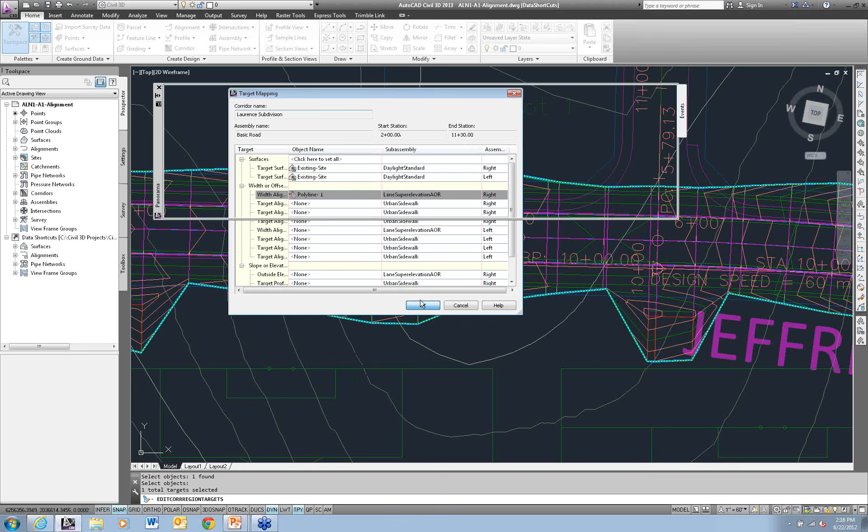Grab that polyline. It adds that to the list of targets. You can have multiple things that it'll target. Select OK. Rebuild my corridor. It rebuilds my surface, and as you can see, I now have a bus pullout here.

All right. So that's roadway design in a nutshell. Three things you have to have: an alignment, a profile, and a cross-section. Take those three things, combine them together, you end up with a corridor model, and this is what we use for our roadway design.

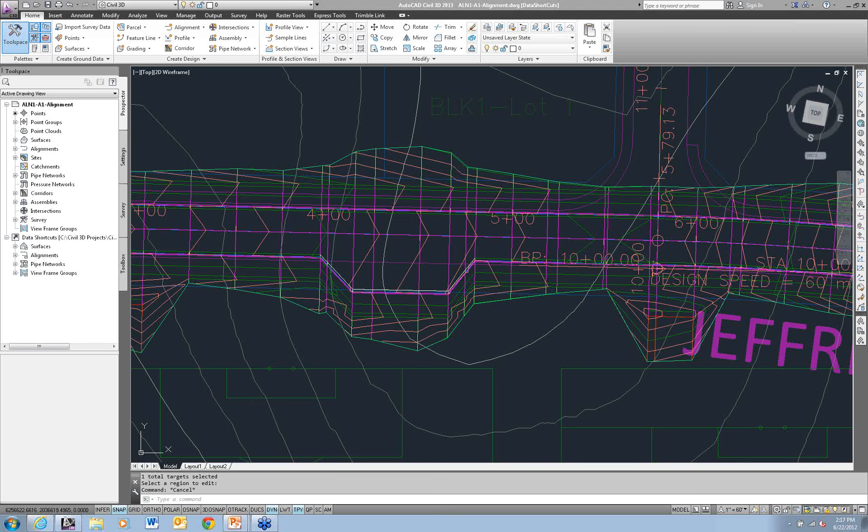All right, looks like we got some questions. Tiffany says, fillet that sidewalk. So you want to fillet just the sidewalk, or do you want to fillet the whole thing here? You can answer that question real quick. Oh, so instead of these sharp angles, you want to do a fillet. Does that sound fair? All right. She says, yeah.

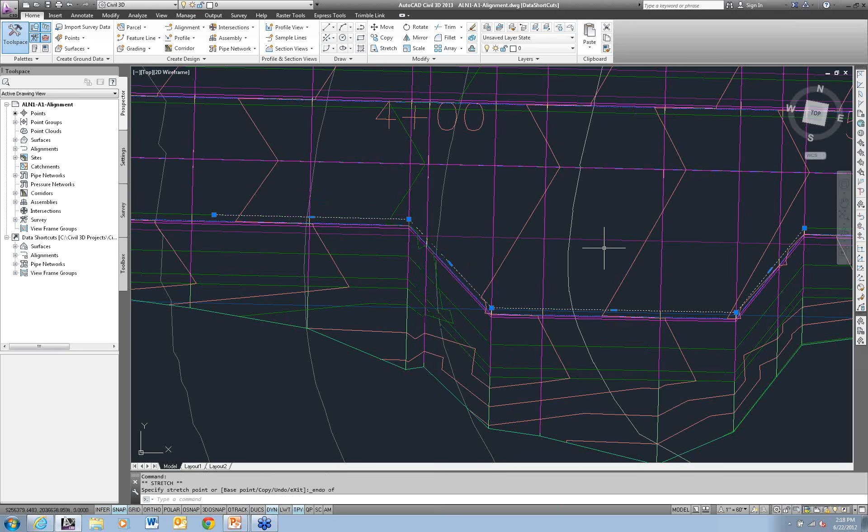So I'm modifying the polyline. Let me go ahead and do this here real quick. I'm not sure if you guys know this, but this multi-function grip stuff is pretty slick. I'm going to add a vertex here, just pick something out here in the middle of nowhere. I'll come over here and adjust my polyline, so it's now the way it was. I'll do the same thing over here. Add a vertex. Up there somewhere. So I just modified the vertex. What radius do you want on these, Tiffany?

I'll run the fillet command. I'm going to change my radius to 5 according to Tiffany, because she does lots of roadway design with bus pullouts that guys have hand drawn in here. And I'm going to simply do the polyline. So I do P for polyline. I grab the polyline and I filleted the polyline. So a 5-foot radius is pretty small. It's hard to see. So I'm going to make it a bit bigger, just so it's a little bit more obvious in the webinar interface.

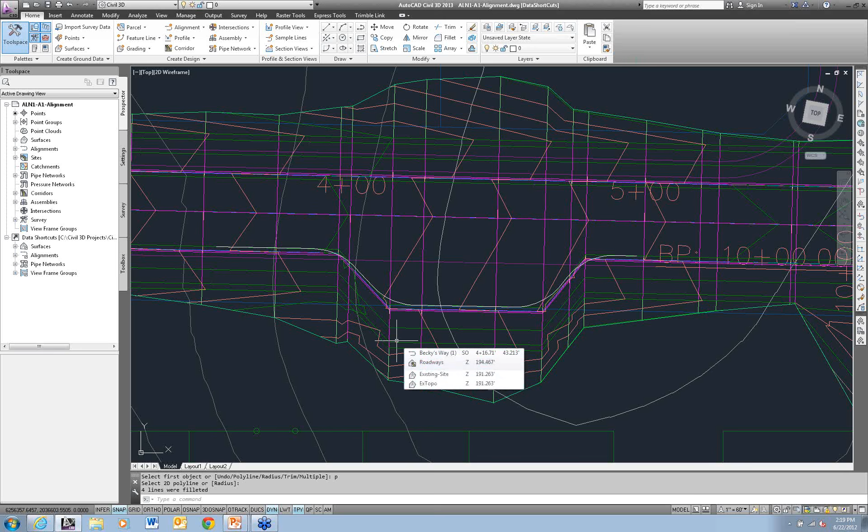So I'm going to fillet this. I'm going to change my radius, say, to 20 feet. And I'm going to do P for polyline. And that looks a little bit better. It's just easier to see. What do I do now? I've made this change to this target. Well, simply rebuild the corridor. Grab the corridor up there on the ribbon, rebuild it. And as I rebuild it, you'll see the corridor updates.

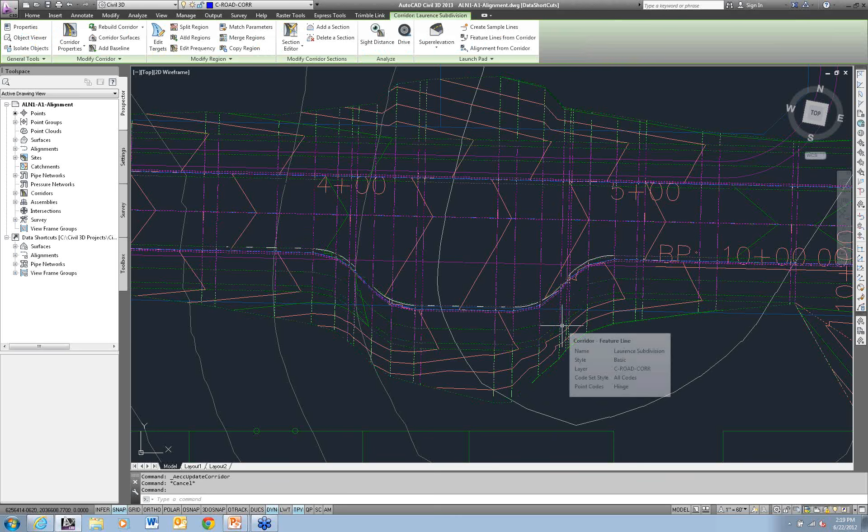So now it's filleted. Ooh, I want to get a little bit more definition in here. So what I'm going to do is I'm going to increase the frequency of the corridor right here in this area. I'm going to split this region. I want to increase the frequency from about there to about there.

And I can now edit the frequency of just this area. Say, hey, I want to do it every 2 feet to give me a little bit more definition here. And there's my fillet. All right, what else do we have?

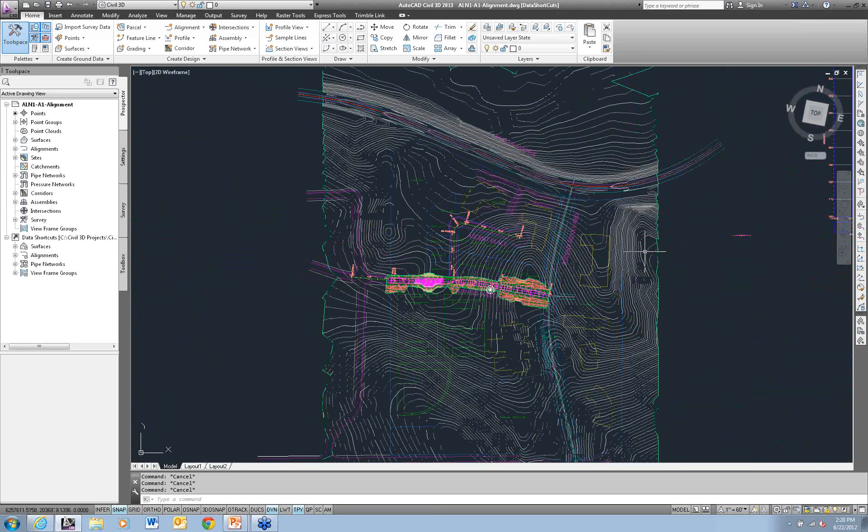All right, another question. When adding vertical curves, how do the other curves work? So when I put in vertical curves, let me go ahead and grab those vertical curve options here. I got a bunch of different options for vertical curves. As far as the free vertical curves go, we have the free alignment, free asymmetrical, free circular, and a free parabolic vertical curve.

All right, so this is the one I'd say 99.99% of all roadway design is done with. It's a parabola. I've only heard of, I haven't actually seen it, one person that wanted to do a circular curve on a roadway design, and I believe he was in Russia somewhere, and they actually use circular curves there.

Some of these other ones are floating curves, so I draw in a line and I can float a curve off the end of it. So it's always going to be tied into that curve. I can do pass-through points. I need to make sure that my curve passes through this specific point. Things along those lines. Fixed curve, basically you pick 3 points and it creates a curve. And there's other options here as well.

So there are lots of options here. You can actually create reverse vertical curves or compound vertical curves using these tools. I have written that procedure up on my blog if you're interested. Let me know and I can get you that website. All right, what else do we have?

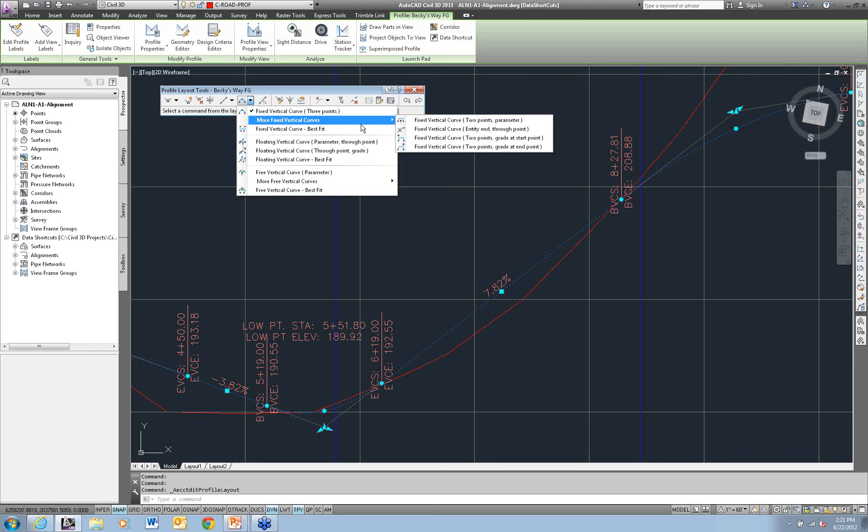Next question here. How about intersections? Well, that's a whole other webinar in and of itself. To do this briefly, there's an intersection command right there up on the ribbon. The last webinar I did was on intersections. I believe we've got that posted up on our website somewhere. So check that out.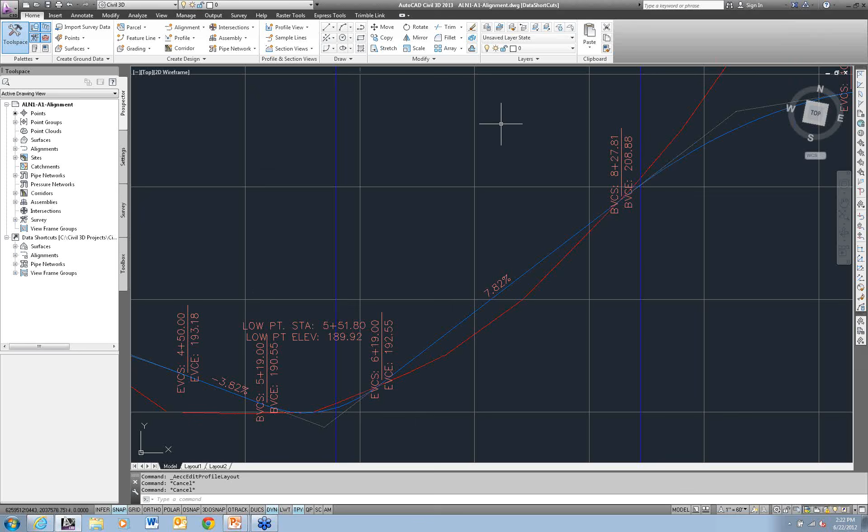All right, next question here is, can you get blue top report or slope stake report from the corridor data? Blue top report. Oh, that's a good one. So this would be grading information. So as I send the grader out, I want to get down to the sub base or the bottom of the sub base. The staking reports.

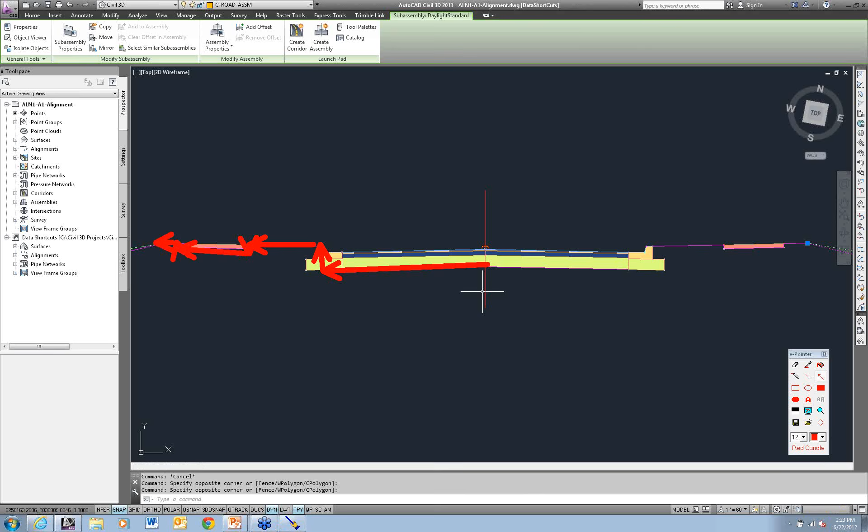Absolutely, you can. First of all, you could just do it from the surface. So I can create that datum surface. The datum surface will actually follow along the bottom of my road, and I can just stake out according to the surface. But I can also create points from a corridor.

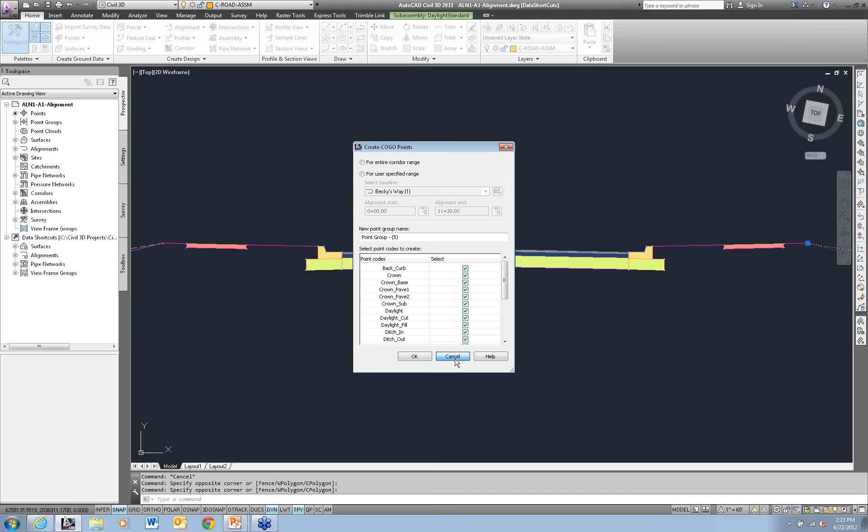So it's going to ask me for a corridor. What code do I want to set the points on? So I go choose the codes that I want to create the points for, and it creates those points for me. So check that out. Hopefully that'll get you pointed in the right direction.

All right, back to the fillet you were working on just a couple minutes ago. A comment was made that the sidewalk looks like it narrows along your fillet. Good catch. So what is happening here in this situation is my sidewalk didn't narrow, it is just skewing. So what did I put in? Let me go check my subassembly here real quick.

So I put in, let's see, a 6-foot boulevard, a 5-foot walk, and a 2-foot boulevard. So when I come over here to the sidewalk, at this location, it's still 6-foot, 5-foot, 2-foot. It's always going to be measured that way, perpendicular to my baseline.

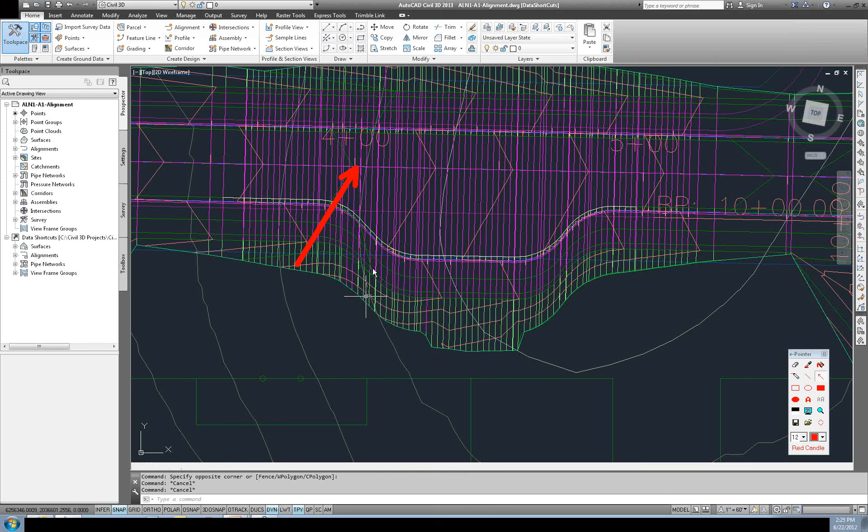So as those things start changing like that, they're skewing. So it's not technically narrowing, but that's the effect you get. If I were to go stake this thing out, it would be a narrower sidewalk. If you need to make sure that this thing stays 6 foot all the way down through here like this, which right now it's not, you need to create what's known as

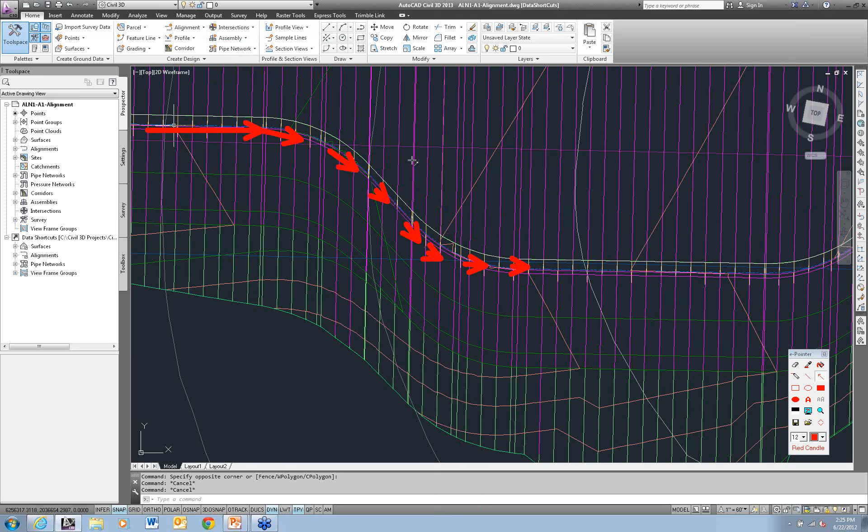an assembly offset. So an assembly offset, for example, would follow along the back of curb of my corridor. I would need to have an alignment that follows along here, as well as a profile. I'm going to attach that offset assembly to that location. And then when I do that, this section line would come out, hit that offset, that alignment, and then the offset assembly would then go perpendicular to the alignment that it was attached to.

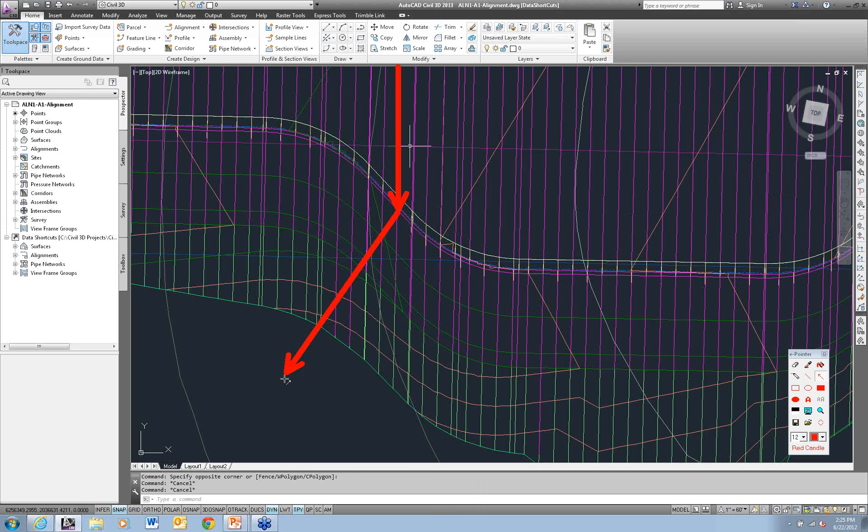So in situations like that, that's how you would take care of it. If you've got a fairly small skew, tell the contractor it's a 5-foot sidewalk.

All right, next question. Are the warnings when we're building a problem that has to be dealt with, or are these to be expected? That's a good question. That depends. So the warnings that you're talking about, so when I come in here and I rebuild this corridor, you see this event viewer pops up with all these hundreds and thousands of warnings. What are these warnings saying in this particular case?

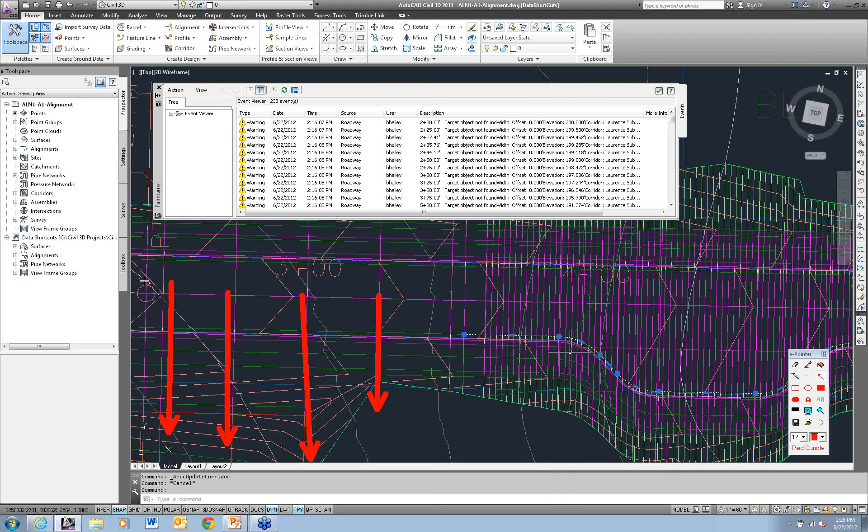Well, this particular case is saying, okay, well, you got this target, this polyline here. I've told this corridor to target this polyline. It is telling me that at this station, it can't target that polyline. Oh, and by the way, at this station, it can't target this polyline. And at this station, and at this station, and all of these stations, it can't target that polyline. So that's what these particular warnings are talking about.

So in this case, these are benign errors, nothing to be worried about. So I can just close out of it. Now, you need to check the warnings to make sure that it's a situation like that. But that's what I see 90% of the time when I'm dealing with corridors and I get errors like that. Okay. All right, next question here.

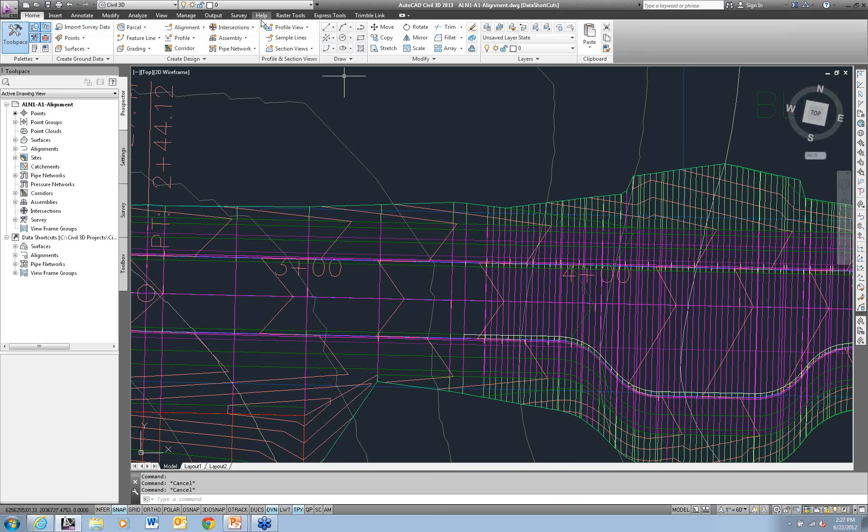How would you go about doing takeoffs from the corridor? Takeoffs from the corridor. Well, that depends upon the kind of takeoffs that you want. If you're trying to get length of things or areas of things, you would use the takeoff manager. So under the Analyze tab on your ribbon, you have the QTO manager. So I'm going to go ahead and load a pay item here real quick. Let me just grab one. So I've got all these pay items in here.

So I would take a pay item and I would assign it to the corridor. And the way you assign a pay item to a corridor is through your code set style. So when you create the corridor, you get the option to do a code set style. So here's my code set styles. And the one I'm using here is this all codes code set style. And in here I can then assign pay items to the different codes.

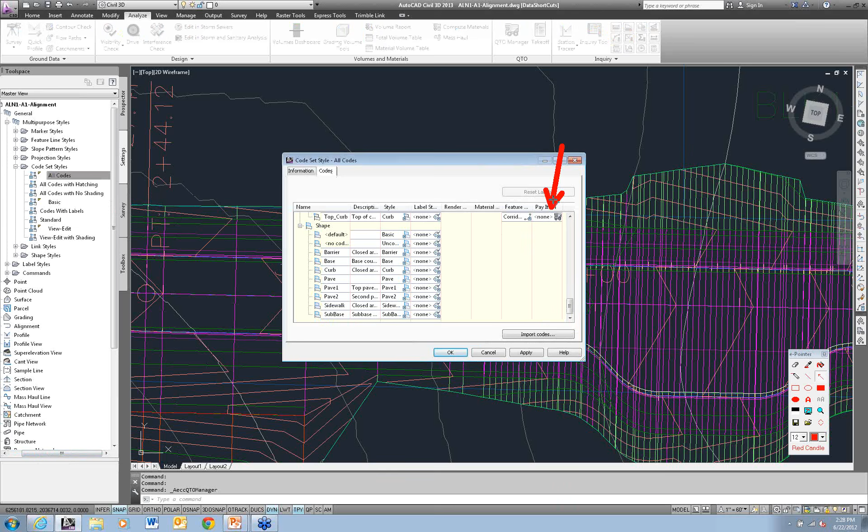So I can assign curb and gutter to the flow line code in my corridor. I can assign asphalt to the asphalt link in my corridor to get an area. So this is one way of doing it. So I can just come over here and start assigning pay items.

The other way, if you want to get, say for example, earthwork volumes or volume of asphalt or volume of concrete, you do that through the compute materials command here. And just to do this briefly, in order to do this, first thing you have to do, you have to sample cross-sections. You sample the cross-sections, you use the compute materials command, and it calculates those materials based off of the cross-sections.